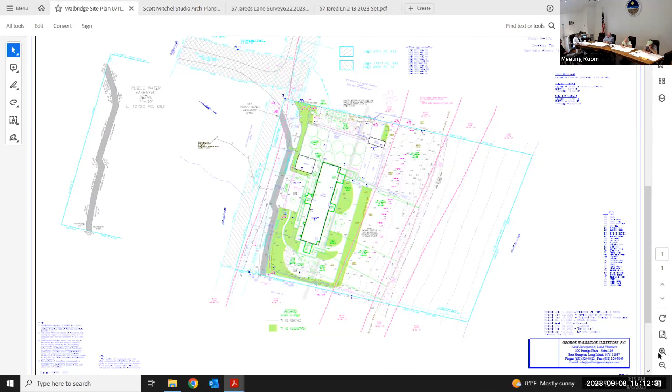So we ask for some relief, which is shown on the survey, for those steps and associated planters. Again, all those setbacks are behind or landward of the existing pool and pool patio. And that's the only setback relief that we're asking for. I don't think you'll be the ultimate judge of this, and I trust you exercise your discretion wisely and fairly, as you always do. It's submitted that the granting of the requested relief will not cause an undesired change in the character of the neighborhood.

We are asking for this help to comply with FEMA flood elevation requirements, which is a good thing. That's why we have good community rating out here, and we're trying to come into conformance. And the dune crest relief, again, as I said, was minimal. We really can't get there by any other means other than elevating the house. I just want to talk very, very quickly about a couple of prior decisions. We had the Sweet Potato Lane.

In fact, we're reducing the gross floor area of the principal residence from 10,087 square feet to 9,929. Not a lot, but nevertheless, it's a reduction. The only expansion of the residence is on the west side. You can see it as a little nub coming off the otherwise rectangular house footprint on the survey. The only increase in the footprint is to an area to construct for utilities being raised to comply with FEMA. Again, a good thing, a very good thing from a health, safety, welfare, and land use point of view.

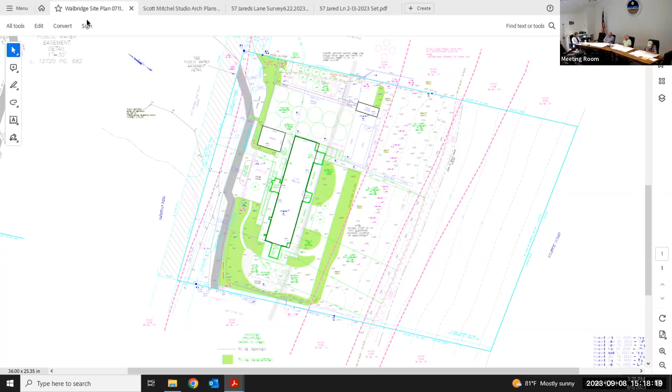So I'm confused. How are you reconfiguring the house if you're driving down? Is it being totally refurbished? Is it being torn down and rebuilt? No, it's not being torn down. I think I would have a hard case if it was being torn down. But how are they getting down to the less square footage from 10,000? 10.8 to 9? What is going on with the house?

Some of the areas on the ocean that are enclosed now, we're going to open them up so they won't count into GFA. It's not a lot. It's about 150 square feet. It's not a lot, but I had to throw that in there because it's less GFA, so that's a good thing, even though it all conforms. That's just merely opening up areas that are now enclosed and otherwise would be included in GFA.

You know, you get under these houses, and maybe the architect can talk about it. What you do is you get under these homes. If you have enough room, you move it off the area. But my guess, and the architect might be telling me to keep my day job, or Ken Buksa might be telling me to keep my day job at any time. Sometimes you crib it up and put these helical piles underneath it, and you just lift it up in place.

Ken or Chris, can you give us some information on how the elevation is going to happen? The microphone's off. Sorry about that. Yeah, so just as John was saying, it's exactly as he stated, lifting the house and putting piles underneath it to get to FEMA compliance. The way that we would be getting to a lower square footage is pulling off of the facade. And this package that you have open right now, I believe, shows the exact way that we would.

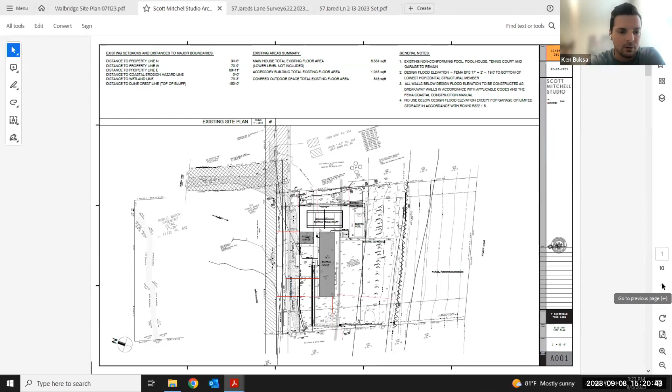Ken, you still haven't answered the question, please. Are you moving the house? That's all I want you to answer. Well, let me ask you the question so we can give the board the information that they're asking for. Are you going to move the house off the site or are you going to crib it up and drive in helical piles? If you don't know the answer, you don't know the answer. We're cribbing it up. Yeah, but he said that he would take the second story off and locate it in the backyard. I mean, this seems like a pretty complicated construction task.

But essentially, you're not taking the house off the site, but you're going to take it off its current footprint? No. Is the house going to be moved from its current footprint, or will the second story be set aside and the first story lifted in place? Is there a basement or a crawl space, or is it on a slab? No, I can't, because I'm in a flood zone. I'm in a high velocity zone. Slab.

I've got to probably drive piles, put on grade beams and concrete piers. So the beams are going to be lifted, with a taller structure underneath, these cylindrical piles, right? Yes. Well, that seems logical. Yeah, and that's the way we do it. Thank you, Ken.

I had the same question about how it got smaller, but I understand it's those outlying areas that get removed. The areas that are going to further encroach into the coastal erosion zone, limit line, whatever, those are merely access structures, like the stairways to get to the pool, which is now going to be much lower relative to the...

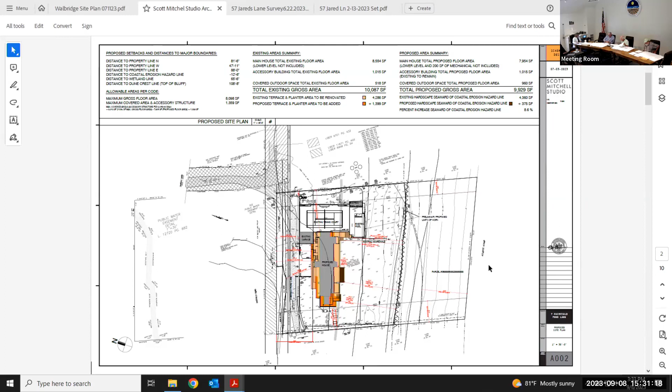but it was denied in Edie Lutnick's case, where she wanted to lift an entire house without exploring alternate locations for a 650 square foot master suite and 250 square foot bathroom that would have been entirely in a prohibited zone. And 1145 Sag Main, they wanted to go to 51 feet. So those are clearly excessive. This one is clearly more moderate, and it's closer in line with the kinds of variances that we grant, particularly in light of what your architect illustrated on one of the last pages of Mitchel Studio's drawings, showing ceiling heights, and how you'd be limited to roughly 7.1 feet or 7 feet 1 inch if you were in compliance both with the FEMA regulations and the height restrictions.

So I'm sympathetic. And again, I said, do not be greedy with the floor package, engineer it. I've had people come in and say, here's the floor package, and I said to the architect, it's a goddamn 3-foot floor package. You don't think people read the plans? I hear you, I heard the arguments, I'm sympathetic. I also appreciated the intent and the ability to compress the floor package and the height and the explanation about the railing. So a lot of this conversation is because you were on record as making certain statements and assumptions with which I disagree, which was that we want people to go to FEMA height, not necessarily. I'm either there or not, I don't get the benefit.

No, well, no, but this is something that I think we should be exploring, which is modifying the code perhaps, or having some latitude in the way the cost of the alteration is calculated, if that's not mandated by FEMA, so that we can allow people to raise their homes to reasonable safety without necessarily going to full FEMA height. Because I don't want this village to look like maybe the Jersey Shore with a bunch of houses up on stilts, just totally obscuring the waterfront from Daniels Lane and from the beautiful open village.

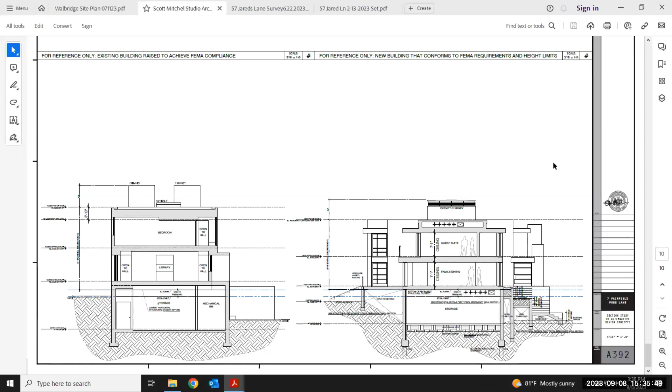I understand that. I can tell you right now, we can limit it to, did you say 35%, Chris? That's right. If you look at the roof plan in the package you have, A104, you can see the dashed green outline represents the existing roof. So do we have a roof railing on any other part of the house? We can do away with that, correct? Where the solar panels are, for example, you don't need that railing. That's correct. So that would reduce the height profile for a substantial portion. I have no problem with that as a condition. I would offer that as a condition right now.

Okay, so I stated my principles about minimizing these obstructions of the view sheds throughout the village, which is one of its outstanding characteristics and unique to the Hamptons, where everything else is hedged in. It might as well be in the Berkshire Mountains. We've got an open village with flat fields, views of the dunes. I don't want structures popping up and obstructing it. So keeping the floor package narrow, minimizing the elevation you're seeking, taking away the railing on 2/3 of that roof elevation seems to me to be offering reasonable accommodations so that the relief being sought is probably the minimum required to accomplish the homeowner's objective.

All right, I've said my piece. Jay, you're listening in on Zoom. Do you have any questions or comments? Yeah, in the package, I would just want to clarify, what is the top of the railing height today? Is it the 44.7 less the 4.7 relief? You're right at 40 now? What is the top of the railing today in the existing structure? Well, we're moving it; I think we want 44.7 with the relief.

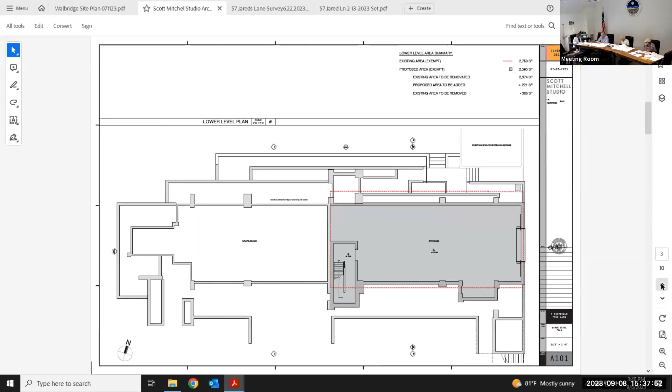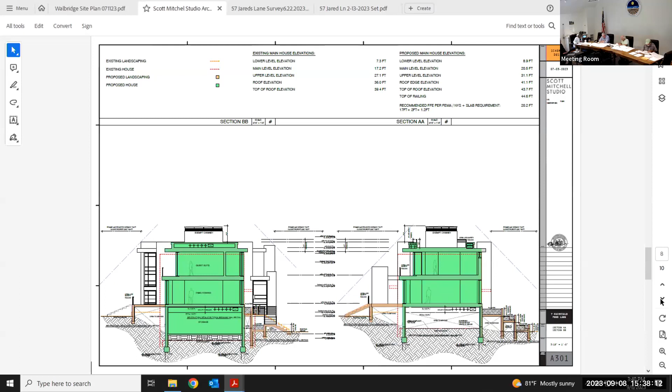I guess the top of the railing today, Chris, do you know, is it at 40 or is it at 41? I'm looking for a drawing that gives me that information. I don't know off the top of my head. It's too small for my eyes to read, but I think it's on that same page that I saw the elevation on the far left side of A392. Is that the answer to the question, or is that the proposed? Let's see, existing building. Where's your existing, Chris, do you have existing heights on here?

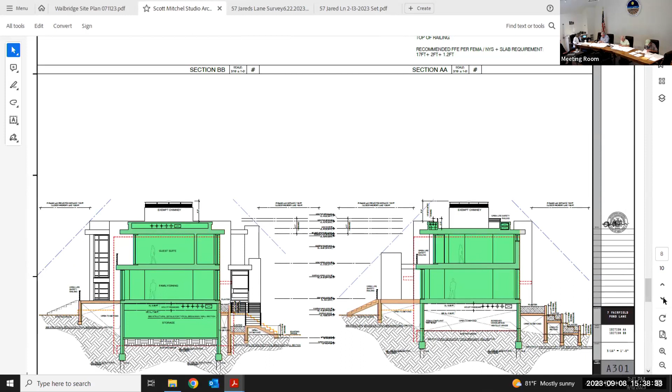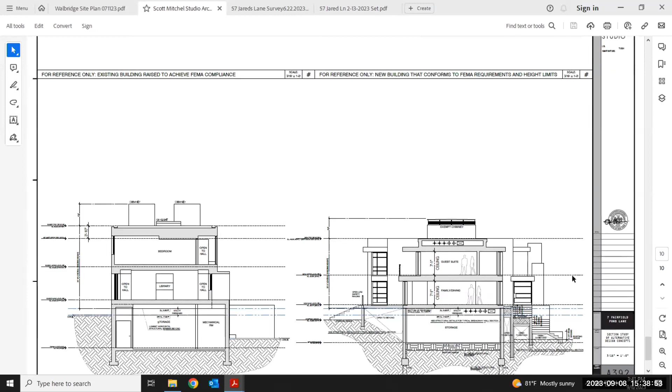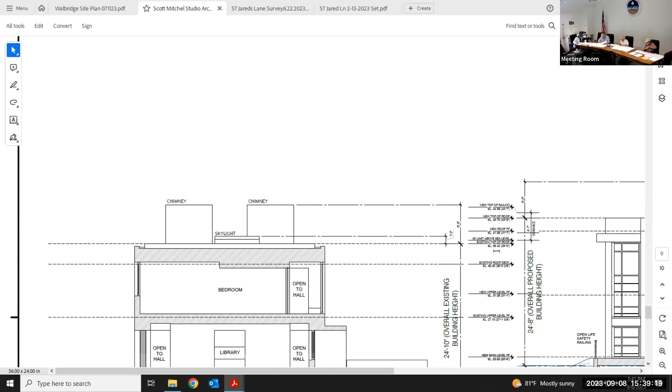Yes, if you look at the series of datums, the horizontal lines across each drawing, not on this page, but on the prior sections. Which page, can you name it by number? A392. So if you look at the horizontal datums labeled in the middle of the sheet, we have existing and proposed elevations. Existing is on the left, and in answer to Jay's question, that line that runs across appears existing top of roof. You don't have the railing, you have the addition roof there, though. Correct. I believe the existing rail matches that elevation at 39.42.

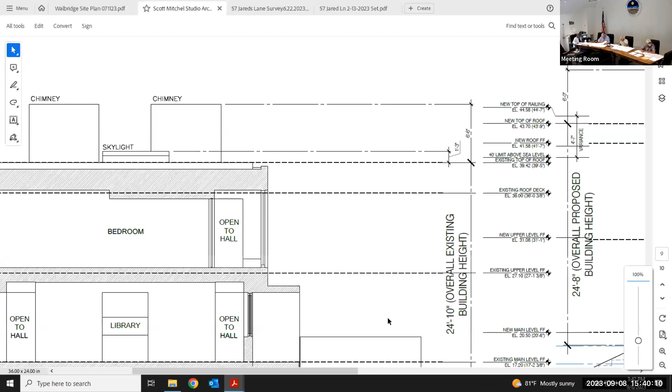Well, I see an existing roof deck and then substantially higher than that, it says existing top of roof. That includes the railing, I presume. No, I wouldn't assume that. Well, then I'm not sure what I'm seeing here. You have existing roof deck at 36, I guess, I can't read it. I don't bring a magnifying lens. Is that 36 or 38? Can you give us that info, Chris? Is the existing roof at 36 3/8, and then the railing would be a foot higher than that, so 37, something like that?

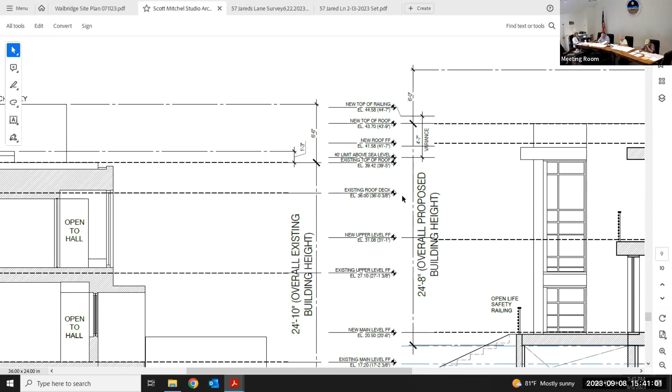The roof deck label there is the surface that you walk on at 36.00. Okay, and so the guardrail would then be probably 36 inches above that, so it's elevation 39. 42 inches is code, I think. Maybe the city, New York is 42 inches. 36, New York's 42, I think. Okay. So the railing we're talking about is, I guess, 4.5 feet or so higher than the existing railing with the proposed, almost 5. Right, which is the 44.7 in the affidavit.

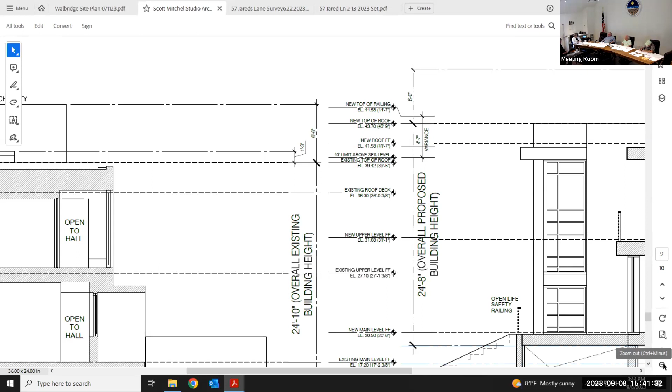Okay, so the total variance is 4 feet 7 at the highest point, which is now going to be reduced in terms of the area that is at that height. We would only have a railing on, again, 35%. I wanted you to talk about that with specificity. It's on A104, it's just in the area of green. All right. So the maximum height exceeding the code is the 44.7, but only for roughly 1/3 of the length of the house. Well, whatever that is, for the habitable, usable area.

And then the remainder of it, without that railing, that's gonna be 36 inches lower. No, it won't be that much, about a foot lower, because the parapet is there, not just the railing. Exactly. All right, but it'll be a foot lower, so that will be only 43 feet. Well, maybe 43. So if someone comes to us and asks for 51 feet, we can say, well, we didn't give anything near that.

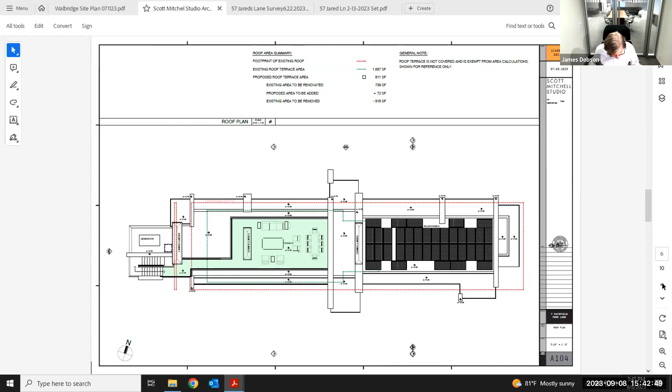Okay, so we have the height of the roof. The railing there, the 0.88, that is necessary to meet code for a proper railing in front of an occupied walking or trafficked surface area? Yes, if it's usable by people, you need that protective railing at 36 inches above that walking level. But there's decking there now, and for obvious reasons, we want to maintain that. Okay. All right, any other questions?

No, that's good. Okay, is there any reason to hold? Do we have any letters from any neighbors or anything in this at all? Nothing. It'd be nice to get letters from the neighbors, I would like that. On one potato, that was one of the critical things, because they were so close, we had letters from both neighbors approving. We didn't require them. I'm not asking to require it, it'd be nice to have, is what I'm saying.

I'll tell you what, if you can get letters from the neighbors that support the application, we will entertain them even if we close the hearing. Written submission will be permitted, but not required. Okay. I just have one more question.

So what, are they renovating the house? What is the purpose of raising this thing 4 feet? What are they trying to do? They're not rebuilding the entire house. They like the house, they want to raise it, they want to redo it. They're gonna redo the inside and redo the house? Yes, absolutely. The inside is very minimal as it is right now. Few partitions and few structures, it's rather minimal. It's a pretty nice modern house.

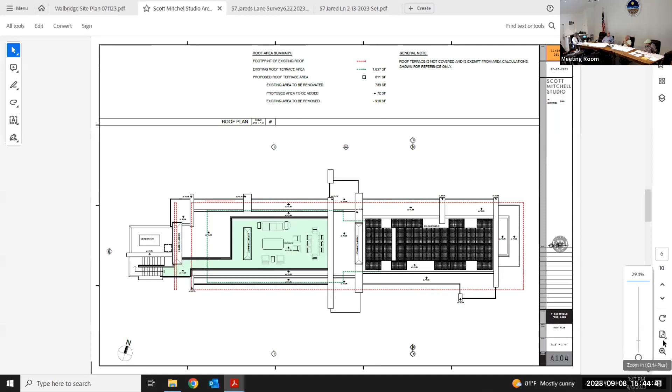And all that stuff, when you start doing that work, it all gets thrown into the 50% limitation. You can't get within the FEMA 50% limitations, because obviously if you're gonna substantially improve a house, the code is made to make it reasonable. But it would be nice to be able to bring it into greater conformity without being required to go to full FEMA height. And one means of flexibility is by changing the threshold of the cost of the improvement, or minimizing the costs so that they don't exceed the threshold.

I actually have a great idea. That way you can have it both ways. What's that? When they put the 2 foot of freeboard in, correct me if I'm wrong, they put it in as a stopgap before they redid the FEMA maps, about 10, 11, 12 years ago. So when they redid the FEMA maps, why did they have to leave the 2 foot of freeboard there? We've already presumably drawn new maps to give better elevation requirements. Everybody knew it was a stopgap. So the federal government should let you say you don't have to deal with the 2 foot of freeboard. Well, that would be helpful. I don't know how feasible it is, but it's something to look at.

Anyway, I've burdened you with solving a problem which is larger than your own application. But I appreciate it because it's important to us. It may be a sickness, but I love talking about it.

All right, if there are no further questions or comments with respect to this application, either in favor or in opposition, I'll entertain a motion to close the hearing. Wait, before we close, Elliot, do we want to keep it open so that they can submit new plans on the new railings? The hearing is closed, but the submission of documents will be permitted up to 10 days prior to the next hearing date in October. October 13th. Okay, thank you for clarifying that.

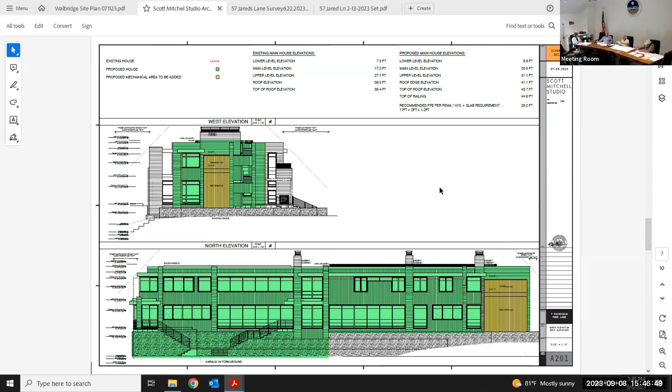Okay, then we'll move on to the second application. Oh, no, I asked for the motion. I'll make a motion. I'll second it. All in favor? Aye. Aye. Unanimous. Hearing is closed. We will entertain written submissions, perhaps letters from the adjacent neighbors. The Horowitz is on one side, and I'm not sure who's on the other side. Okay, thanks, John.

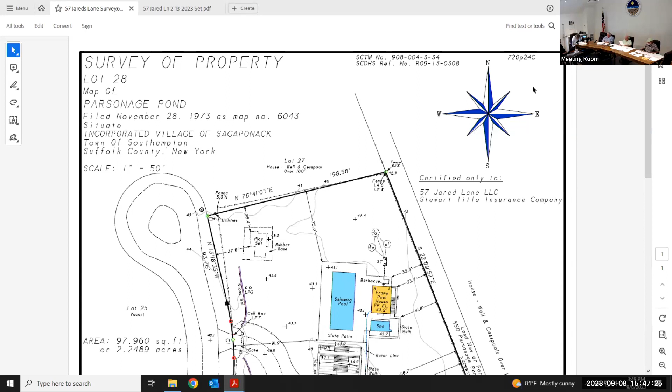Thank you all. Our next application is that of 57 Jared Lane LLC, application 5 of 2023. This one is also a little exotic. It's an area variance for FAR for an addition, effectively to legalize a bedroom over a garage, which was a pre-existing bedroom that had to be removed to comply with code. There is an upgrade of the septic system, which would enable the installation of the bedroom, but it will then be an expansion of the FAR, which is why you're here. I hope I haven't stolen your presentation. It's a great one. For the record, my name is Jackie Morley, here on behalf of the applicant. On Zoom we have Crew Brothers Construction as well, in support of the project plans.

We categorize it correctly. Our client purchased the property. Oh, yep, we have those, sorry. No, that's okay. I just want the record to show we received the affidavit of posting.

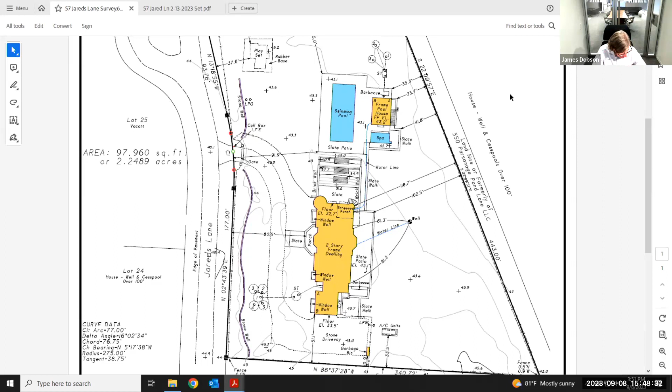And could the speaker get a little closer to the mic? We're having a little hard time hearing it online here. Apologies for that. It may be hard to hear. Okay. A little bit loud.

Sorry about that. So as you had said, the bedroom was existing when the house was constructed in 2016, when our client purchased the property in 2021. In order to deliver this CO, it was existing, but it was not a legal bedroom. It's not legal. So it's not a pre-existing non-conforming use, because it wasn't legal at the time that it was there. Right, correct. I hope I didn't say that. No, you didn't. I just want to be clear.

Yeah, absolutely. So in order to receive the CO, it was then removed and our client purchased. So it now sits, and I think we have exhibit E, we have pictures of the interior and also the exterior. It sits unfinished above the garage. The applicant this time would like to apply to fill it out. As you can see, it's a 582 square foot increase from the allowable FAR for this dwelling.

So, from the exterior, it has no real change to the current dwelling. It really just was a build out of an existing framed out area of the garage. This property dwelling is in line with the size of the other dwellings in the area. This would create 8 bedrooms. There's a 9-bedroom house around here too. What the applicant is proposing is the most minimal way to achieve this goal, being as it already is there and laid out.

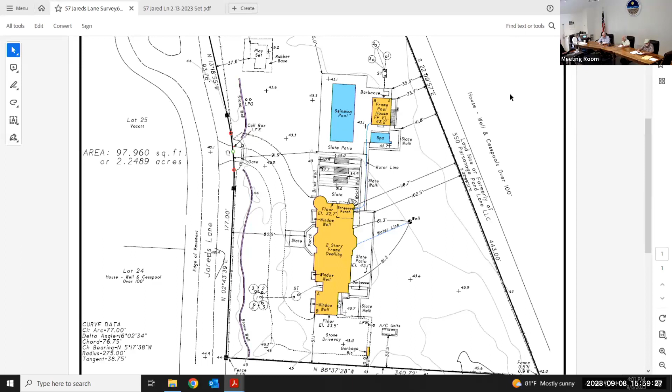All right, anybody have any further comments, questions? If not, I will entertain a motion to close the hearing on this application. Second. All in favor? Aye. Thank you very much. All right, there's no further business before the board today. I'll entertain a motion to adjourn the meeting. Second. All in favor? Aye. Okay, meeting is adjourned. You can cease recording. Thank you very much.